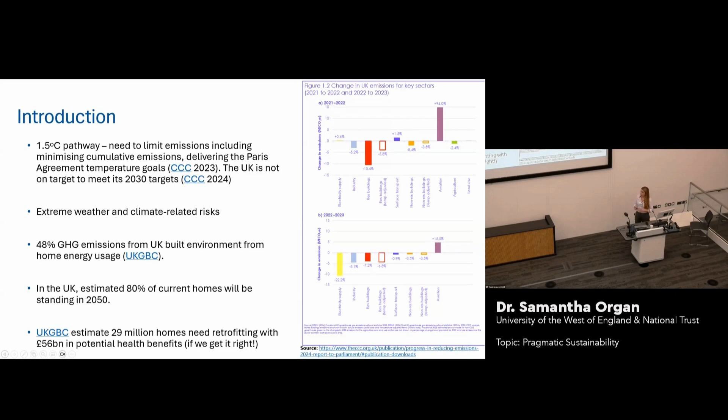So we'll all be aware that the IPCC has made it very, very clear that climate-related risks for both human systems and nature are higher for 1.5 degrees Celsius pathway in comparison to the present, but actually lower than 2 degrees Celsius. We're unlikely to meet that 1.5 degrees now, but we urgently need to limit greenhouse gas emissions, including minimising cumulative emissions. Yet the UK is still not on track to meet our 2030 targets, according to a recent Climate Change Committee report. We know that our weather is becoming more severe, certainly seeing that in this country as well as abroad. And we're continuing to see the impact of anthropogenic emissions in relation to this.

But whilst unavoidable, action is still needed to mitigate those climate change risks. We desperately need to put the brakes on our carbon emissions and upfront carbon. We know that of the emissions in the UK's built environment, 48% of greenhouse gas emissions are from home energy use alone. Given that an estimated 80% of our homes currently in the UK will still be standing in 2050, action is urgently needed from our domestic property sector in reducing carbon emissions. This, of course, has other benefits too. So the UK Green Building Council has estimated that this could be about £56 billion worth of health benefits just from retrofitting 29 million homes, but only if we get it right. And we've seen already that there are some potential pitfalls, which we've explored already in today's session.

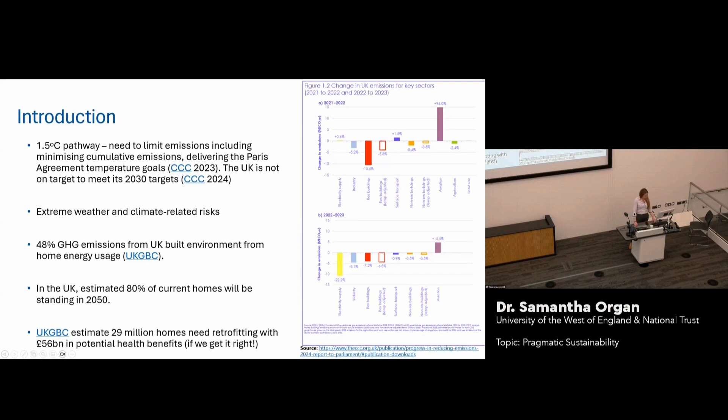But that's not the only thing to tackle, which is really exciting, isn't it? A wicked problem. The UK's non-domestic stock is estimated to contribute to 23% of operational emissions. Given that an estimated 70 to 80% of non-domestic property was constructed prior to 2000, this means that we need to retrofit to improve energy efficiency of these buildings by 2050. There's, of course, a commercial aspect to this. There's increasing demand for energy efficiency and carbon reduction amongst those who own, manage and finance our buildings, particularly on the commercial building front. Of course, it's not all about carbon and energy.

Half the world's raw materials have been used to develop our built environment. Construction is responsible for approximately 15% of fresh water use. There's a direct and indirect impact on biodiversity from construction, and we're not even going to mention the quantities of waste we send to landfill.

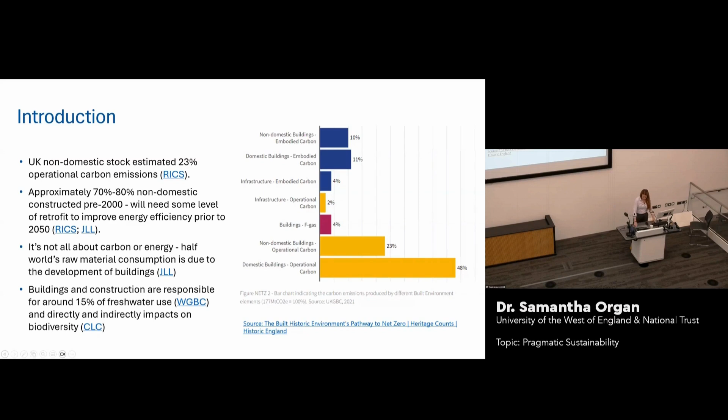And there are a huge number of different approaches we can adopt, and so it can feel quite overwhelming when we're approaching these sorts of areas. There are a couple of examples on the screen, taken from Historic England, Purcell, and JLL. Of course, there are other frameworks, such as PAS 2035, 2038, as well as others. I'd also add here that a people-first approach, as part of what Bill calls a proportionate retrofit strategy, is probably needed.

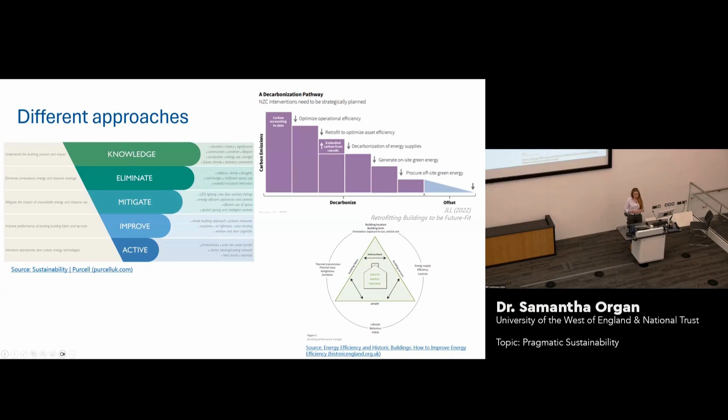You'll be thrilled to know that I'm not going to read all these bullet points out, death by bullet points and PowerPoint. But as you can see, there are many different sources of information to inform our understanding and knowledge, just as a starting point. These may include opportunities as well as restrictions, as well as just things to consider, but they are needed to guide our thought process and our decisions.

In addition, it's worth noting that successful retrofits desperately need whole building thinking, and we've seen a little bit of that in today's earlier talks. There needs to be a change in people's behaviours, their attitudes, including expectations of comfort and what to invest in. This is likely to require engaging with stakeholders about comfort as well as discomfort, and perhaps what we need to invest in.

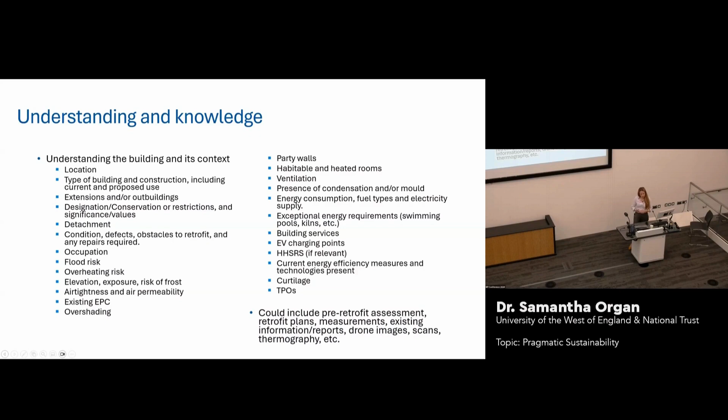How many of you have ever used EPCs? Raise of hands. Okay, and have you done that recently? Who's commissioned an EPC recently, or multiple EPCs? There must be more of you in here.

Don't be shy. You can tell I've done some lecturing, can't you?

Awful. So what I'd really like to know is how many of you use those to inform your retrofit decisions? Thank you for your honesty. There'll be plenty of other people in the room who do. Okay, so we know EPCs and their ratings can be inaccurate. Would you agree? Yeah. And recommendations, would you say they're suitable or unsuitable generally? Okay, so generally we're on the same page, which is good.

I like this. So they tend to overestimate energy in older buildings and underestimate it in newer ones, with RdSAP typically assuming thermal performance to be poorer in our traditionally constructed domestic properties. Previous research has indicated that the same property with two different assessors can actually be two whole EPC bands apart. That's huge, and that also has implications if you're renting out your properties in terms of MEES.

As we know, the EPC is currently being amended, which is good, and will be replaced in a few years by the Home Energy Model. But we don't know what the impact is going to be on the ratings. Following Labour winning the election in July, MEES targets for domestic properties have been reaffirmed. Our domestic properties will need to achieve an EPC C by 2030, and commercial buildings will need to achieve a B by 2030. But EPCs can only tell us so much.

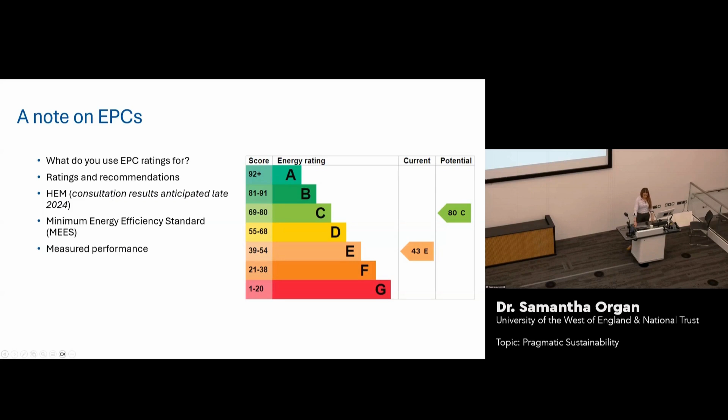For more accurate information, we can undertake measured performance and look at energy use. This could include in situ U-value measurements, air tightness tests, and so on. There are also a huge number of guides and frameworks already available, with examples on the screen also representing different types of various outcomes. So it depends on what you're trying to achieve or what your client is looking for.

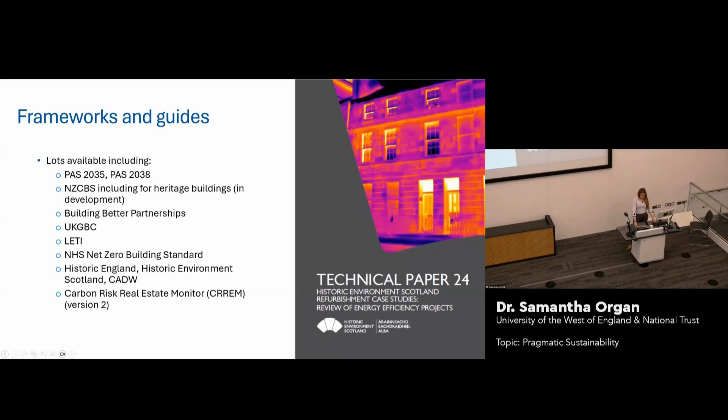There's also the upcoming Net Zero Carbon Building Standard, which includes a heritage component, which Bill and Jill and myself, as well as others, have been involved in developing. Whereas other tools and frameworks, such as the CRREM, help identify things such as the potential stranding point for our assets. So quite different. And there's a huge range of different outcomes that we could achieve.

So it's really, really important to clarify this early with clients or building owners to understand what they're looking for, what they're desiring. They may not know, or they may think they know. And so sometimes it's about eliciting that from them to make sure that actually what you deliver is what they're looking for and what is helpful. It's also likely to impact on the approach you adopt and the measures you specify.

It's also worth considering how success is going to be measured. So what are the agreed outcomes and what is that going to look like towards the end? Because actually you need to be able to demonstrate that success when you reach the end of a project.

Given that around a fifth of the domestic stock in England, and around a third of the non-domestic stock were all constructed prior to 1919, that's a huge proportion of our stock here in the UK. So we need to consider how these buildings perform relative to their modern counterparts.

We need to know the character and the behaviour of heritage buildings when undertaking retrofits. This is fundamentally different from our modern counterparts, but we need to understand it to help inform our decisions and avoid causing negative unintended consequences.

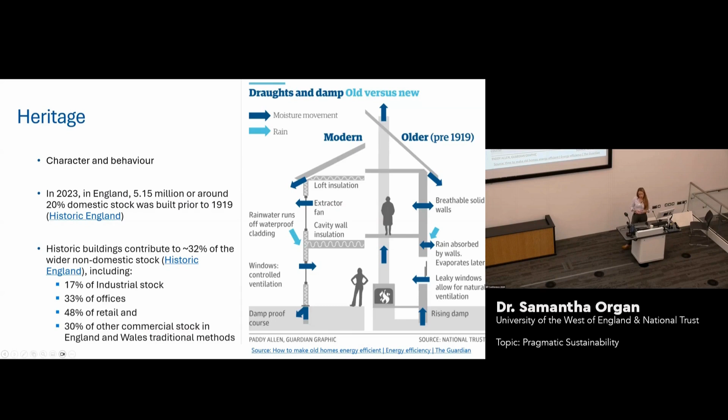So defects, the topic of this conference. To remedy those defects, that takes time to investigate and also find solutions and will cost money to resolve. Budgets and resources are quite often restricted and becoming more restricted as we see the cost of living bite in. Planning interventions over the longer term can be a practical approach, but should be carefully considered. This can help with practicalities such as finding cost efficiencies, limiting disruptions, and so on.

But scaffolding is a big cost to projects. When planning works over the longer period, try to look for cost efficiencies, such as whether you can group works together to limit the number of times you have to include scaffolding in your project, but also thinking about those other bigger outlays. Can you also try to reduce disruption to tenants or occupiers of those buildings just by grouping works together or phasing it?

There can also be smaller, simple wins through optimizing the existing systems. So these can reduce the need for many other interventions, thus saving budget, but also avoiding adding unnecessary carbon in terms of embodied carbon.

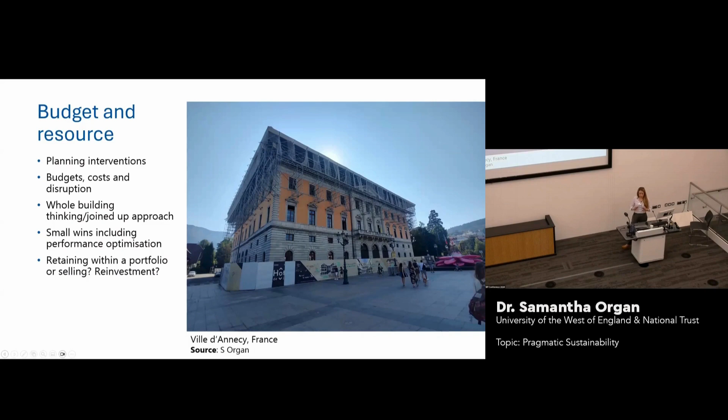I often hear that budget won't stretch to energy performance. I hear it all the time, and it's often the first thing to get cut when we're trying to value engineer. But there are things we can do as building professionals which may not tip the dial for things like EPCs, but can still make a difference elsewhere, in places such as comfort, for example.

In addition to improving our building condition, making improvements to lighting, draught proofing can be really helpful, although consideration is still needed for ventilation. Other things to potentially look at include things like boiler flow temperature, where possible, loft and loft hatch insulation, and softer retrofit measures, such as heavy curtains and carpets with quality underlays.

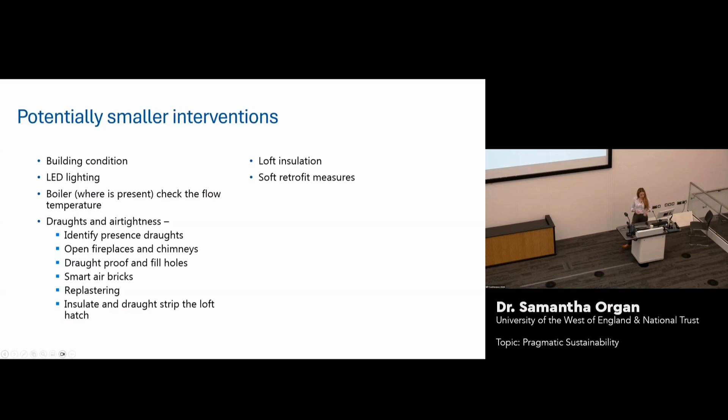As part of the design and specification, again, taking a longer term approach is important. I'm talking not just in relation to planning works, but also in relation to maintenance and lifespans of the products and measures being specified. Think about whether there are solutions and resources that could be sourced locally to try and limit embodied carbon. Although, let's all admit that at the moment that's quite challenging because it's not always a local solution that we can find.

As we increase air tightness in our buildings, it's really important to consider the ventilation, as mentioned, and not just by me in the earlier talks. What level of ventilation do we actually need? This may be higher for buildings with higher levels of relative humidity, for example. So we need to do it on a case-by-case basis. So determining the right level of ventilation is important. Is natural ventilation enough, or will mechanical ventilation still be needed?

Think also about the purpose of each measure. For example, a PV system. Is it being installed for heating, electricity, EV charging, something else, or a combination? If it's going to be used for something like a heat pump, when would you need the most energy in the year?

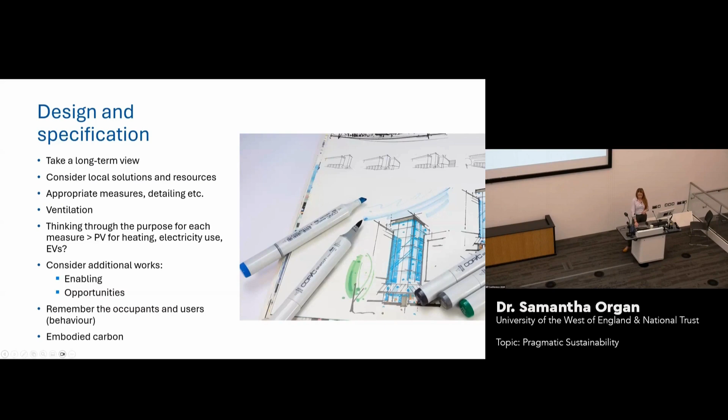We also need suitably competent contractors and consultants, and I hear this a lot at the moment. Publications and discussions in industry have highlighted that the workforce is not widely up to speed with delivering these types of retrofits and interventions. Some organisations such as Grosvenor are helping to support the upskilling of their supply chain to help with this, whereas some contractors have noted a business opportunity of upskilling, but this can be at a significant

cost to them. We need to consider not only how competent those we are contracting are, but if there are any opportunities to support upskilling and development of them. And this is because actually we can help avoid incorrect installation of measures, particularly when it comes to new products. We also need much greater integration and collaboration rather than working in silos. This is potentially challenging in an industry which has been highly fragmented.

Correct commissioning is also an important consideration. I'm giving you a lot of different considerations here, so I apologise. But if it's done incorrectly, it can not only result in systems not operating as intended, but can give rise to frustrations, comfort issues, higher costs, and overall deter people from installing these sorts of products in the future.

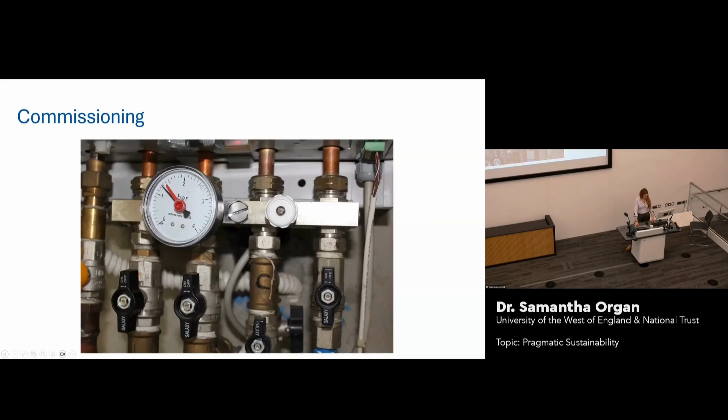How do we know if an intervention has been successful? The motto of the RICS is est modus in rebus. If, like mine, your Latin is a tiny bit rusty, I'll translate it for you. There is measure in all things. Post-retrofit measurements provide an opportunity to identify whether a building or system is performing as expected after a retrofit, and if not, why and whether this can be remedied.

There are a huge number of potential unintended consequences cited in the publications and witnessed by all of us in industry. We can avoid these through whole building thinking, using our professional knowledge, as well as using tools such as the STBA Responsible Retrofit Guidance Wheel. Importantly, just avoiding overcomplicating retrofits, measures and systems can really help avoid the issues. So keep it simple.

The BRE's 2016 publication on solid wall insulation, a little bit old now, but still relevant, identified 29 potential unintended consequences. I've boiled these down to 8. So you've got typically moisture, air tightness and ventilation, impact on aesthetics, impact on property value, disturbance during installation, impact on maintenance, reduced daylighting, and potential impact on fire risk.

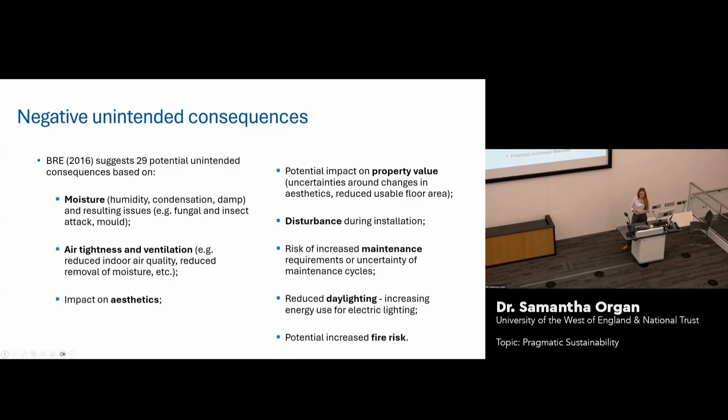How many of those can we design out? Would you say quite a few? I would say quite a few. Just by thinking that through at the design stage of a retrofit can really help design out unintended consequences.

How a building is operated impacts on emissions. Knowing how it is performing during operation is important, so measurement and monitoring has a role. And this can help with tweaks and adjustments to the systems to help performance.

Green clauses for leases can be developed, and there is guidance out there on this, including Better Buildings Partnership, for example. But it's also worth noting that there's been some case law in this area, such as Clipper Logistics versus Scottish Equitable, in relation to adding green clauses to lease renewals. It's a bit of a minefield, so just watch out for those sorts of things.

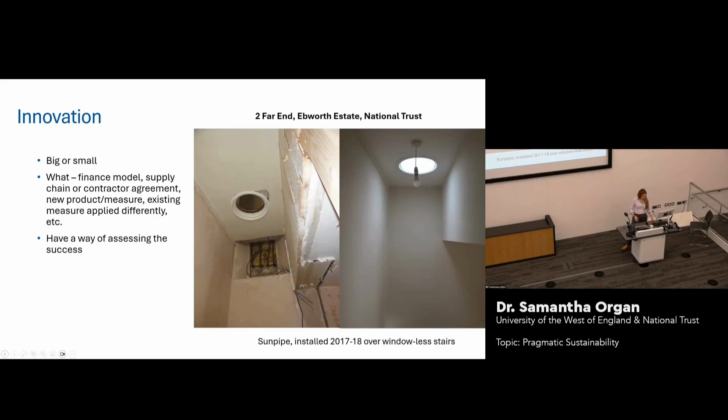So I'm going to talk about a few examples now, 2 from the National Trust and 2 others. I'm also going to reference a couple of people in the room potentially, keeping you on your toes.

So I'd also like to shout out to Sam Walton and Rebecca Mitchell. If you put your hands up, please. They don't know I'm doing this. So in the breaks, go and talk to them, find out what they're working on, because some of the work they've done has been incredible, and I really encourage you to go and quiz them. No pressure, guys.

Okay, so we've got a property on your left called the Red House at Dunham Massey. And this was occupied until just during COVID by some elderly tenants who passed away. The property required retrofit before releasing. The EPC increased because of that retrofit from a D to a C, so not a huge jump, but still a jump. And the measures included internal wall insulation, upgraded secondary glazing, draft proofing, loft insulation, a wood burning stove, and a new sewage treatment plant.

The budget sadly couldn't stretch to an air source heat pump, so a gas combi boiler, quite unusual. Most of our properties are not on the gas network, but a gas combi boiler was installed with wall insulation. With the wall insulation, the team are hoping that if budget ever becomes available, then they can add a heat pump later.

On your right, you've got Cinderbarrow Farm on the Sizergh estate. This achieved an EPC A with internal wall insulation, insulation to the ceilings and floors, double glazed windows, wood burning stoves, an air source heat pump, which is supported by a PV array on the barn roof.

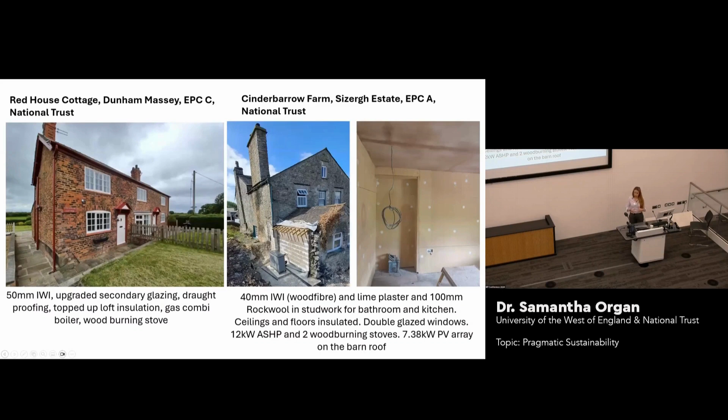Due to the available budget, neither property undertook in situ measurements, but we've all done things like this, where we've used the EPC to really guide some of our direction, as well as use our knowledge of the property, which was excellent from the local surveyors at the time. But had budget been available, wouldn't it be great to be able to do some before and after measurements?

So this property is under the care of Gareth Fleming. So hand up, Gareth, please. And he's done a phenomenal job with this project. So he's far more knowledgeable about this than I am. So in the break, Gareth's your man.

This particular Grosvenor property is on their Eaton estate in Cheshire. Despite the EPC D rating that they've achieved, the retrofit actually achieved a reduction in whole life carbon of 83%. It also halved the annual energy use, lowered the heating emissions by 94%, and achieved a LETI rating of A+. So quite phenomenal. The EPC was completed prior to the building regulations sign-off, I'm told. So they're hoping that they're going to redo that EPC to get a bit of a more accurate feel, but once the RdSAP has been updated, which I think is quite sensible.

So in situ measurements were completed before and after the retrofit, with U-value pre-retrofit measured at 1.28, which is much lower than the 1.7 assumed by SAP. So is it worth doing the measurements? After the works, the U-value dropped to 0.51. Air tightness pre-retrofit was already relatively low, which is surprising given a Victorian building, at 5.64. This reduced to 4.17 post-retrofit.

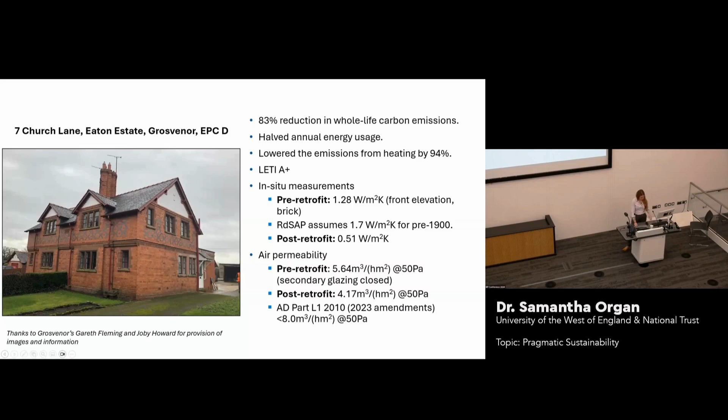The team investigated and decided that achieving a lower air tightness did not provide sufficient improvement to the whole life carbon to justify the gain in embodied carbon. A PHPP was used in advance of the retrofit as well to help understand and inform decisions. You'll see a couple of graphs on the slide, which formed part of the decision-making process about which measures to install, including whole life carbon calculations for the existing buildings.

And that includes a retrofit with a gas boiler and a retrofit with an air source heat pump. Which one's lower? The graph on the left, let's say, might be easier. So the one with the air source heat pump, so much lower. So when they went to electrify the heat, that's where the big drop came.

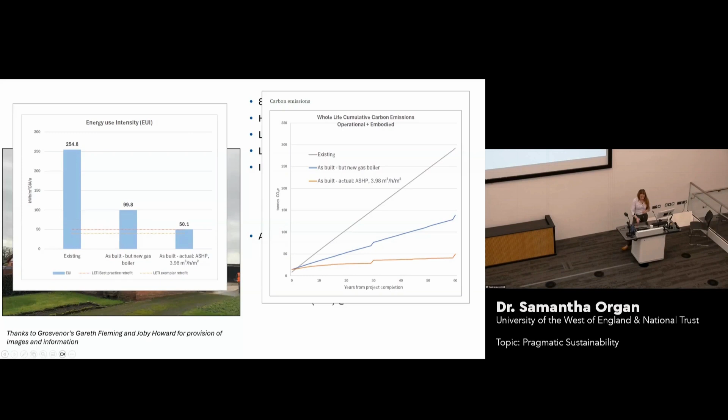The building is also on the gas network, so very, very lucky for a rural estate. And it would have been cheaper and simpler just to use a combi boiler and radiators. But because this was a test project, the team had a look at the different options and assessed those. So their calculations showed, as we saw on the previous screen, that only when fossil fuel heating was replaced with electric heating that the biggest whole life carbon was achieved.

Based on the carbon emission savings, the air source heat pump was installed. Due to the fabric improvements, the team are still confident, I would say, that the running costs won't be excessive. They've included an MVHR system, but they found that this complicated the roof insulation. There are many advantages for including an MVHR, but the team found that it wasn't particularly straightforward and it relied heavily on mechanical plant and ductwork, which may not be that practical for other properties.

So for some of the other properties on the estate, they're exploring things such as passive ventilation, DMEV, humidity-controlled extractor fans, and so on. They also found that experienced installers and commissioners were needed for this system. The tenant was also provided with some training, and they're expecting to undertake the maintenance manually.

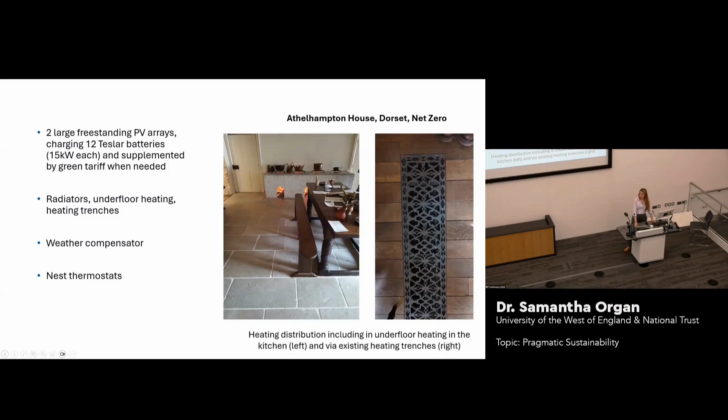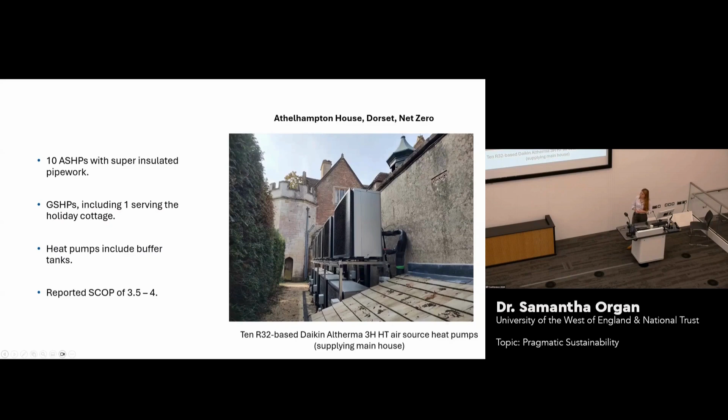There are 10 air source heat pumps. I have to say they were quieter than the fountain pump when I walked past them, which is quite surreal. There are also ground source heat pumps, with one serving the holiday cottage. Heat pumps all have buffer tanks, and the reported seasonal coefficient of performance currently is 3.5 to 4, which is excellent.